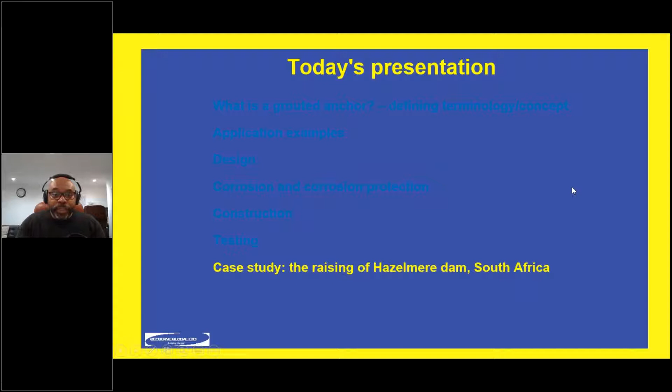It's a very broad-based subject that attracts a lot of controversy, regardless of what region you're dealing with in the world. Having gone through all that, I'll tie things up with a case study, a raising of Hazelmere Dam in South Africa, which should hopefully bring everything I've discussed into play and give you a full example of how these systems are applied in practice. Then finally, I'll tie things up with some closing remarks. So that's our setup today.

Starting off, if you approach someone uninformed and talk about the term anchor, the first image that comes to mind is the thing you throw over the side of a boat to stop it floating away. You throw a device which attaches itself to the seabed or ground below, with a chain or rope connected to it, and that's connected to the boat, stabilizing it on the water.

In many ways, a ground anchor acts similarly, but instead of stopping a boat floating away on the water, what we're essentially doing with a ground anchor is stabilizing a structure on the surface to stable ground beneath it. In certain applications, we're attaching unstable ground near the surface to more stable ground beneath the surface using similar technology.

I've extracted a figure from the execution code EN 1537, used in Europe. But regardless of where you are in the world, the basic elements of a ground anchor will be the same. I'm just using this as an example.

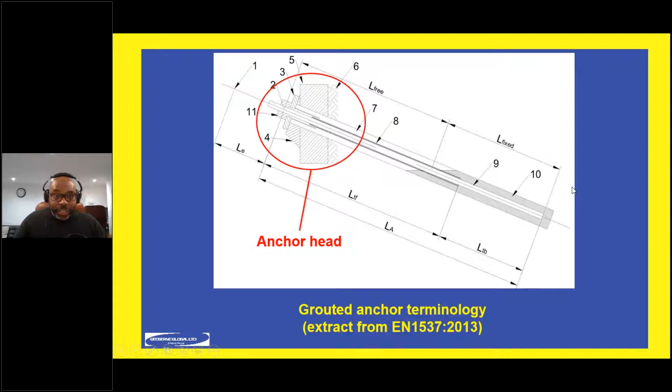I'm going to mention three main aspects of an anchor. First, the anchor head, the part of the anchor you can actually see, attached to the structure. Although in not every scenario can you access it, generally in anchor technology you can see the anchor head at the surface.

I'll then describe the free anchor length, a part of the anchor that's very important because it transfers loads from the surface through the ground to more stable ground beneath. The important feature of the free anchor length is that it's decoupled from the surrounding grout around it, so all it can do is transfer loads axially, not transversely — transferring loads from the anchor head through the ground to more stable ground beneath.

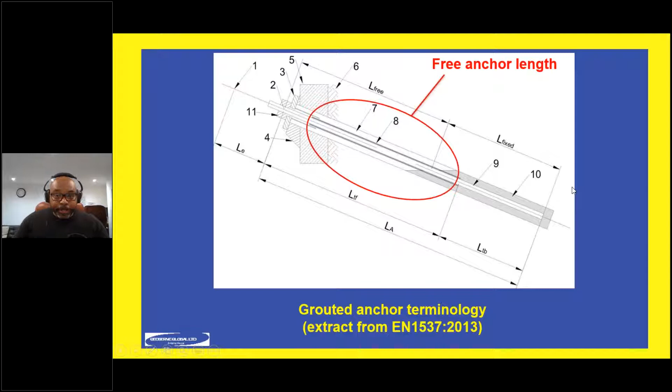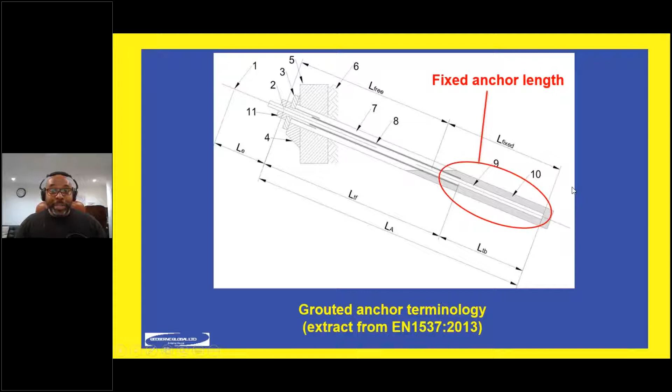The third element is the fixed anchor, which is a coupled feature — the free anchor length was decoupled, but this is coupled. It's attached to grout, which applies fixity to the surrounding ground. If you look at the analogy with the boat floating on water, this would be your anchoring mechanism on the seabed. The chain would be the free anchor length, and the attachment to the boat would be the anchor head. That's how we build the analogy with the boat.

Now we're going to really look at the concept. At the lower end of the scale, dealing with small anchors, or what we call rock bolts, generally they're about 6 meters long with loads not exceeding 10 tons, 100 kilonewtons. Usually if you have an excavation in ground, particularly in this example a tunnel, depending on how you excavate it, let's assume you're blasting through virgin rock. Generally you'll have a zone of unstable ground around the excavation.

If you drill through that unstable ground into stable ground and place a steel tendon or bar through it, grout it at one end, place an anchor head at the other, and apply a nominal tension, you can invoke a zone of stabilized compressive ground around that opening. If you do that in a fanned array, you can create a zone of compression around the whole opening and essentially stabilize it. That's the lower end of ground anchor technology — small lengths and small loads.

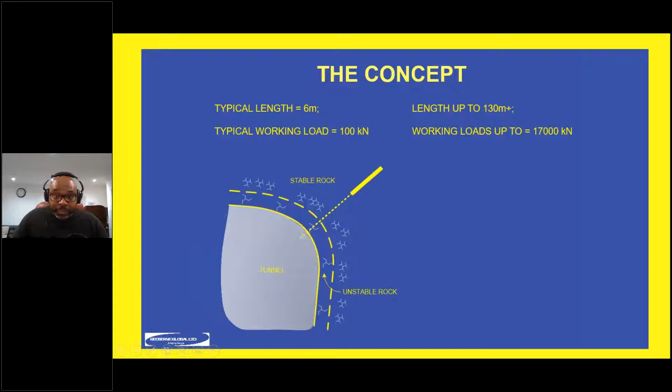As we increase the technology, we go up to the far end, where you can have lengths of over 130 meters and working loads in excess of 17,000 kilonewtons. These are massive systems, generally applied to dams, because a dam is a water retaining structure, and the philosophy is that the fewer holes you drill in a water retaining structure, the more benefit you'll derive. So large anchors have been developed for dams for that very reason.

What happens here is that when you want to resist overturning or sliding forces, you'll drill through the dam into stable rock below, place your anchor tendon in that, grout it in, apply the anchor head, and once you apply tension, you create a compressive force on the dam structure that effectively resists the overturning and sliding forces imposed by the stored water.

So those are the two ends of the scales, and hopefully that's illustrated the concept of how anchors actually work. What I want to move on to now is looking at some key applications, projects I've worked on personally and extracted from colleagues as well, showing you a wide range of applications on a worldwide basis.

So we'll start by looking at how things were done historically. Propping and shoring was a typical way to support an excavation. You'd produce an excavation in the ground so it doesn't fall in on you, typically shore it using sheet piles or wooden cladding, and then prop it. That was effective for many years, but looking at those photographs, you can see it doesn't facilitate the construction cycle because it's very cumbersome.

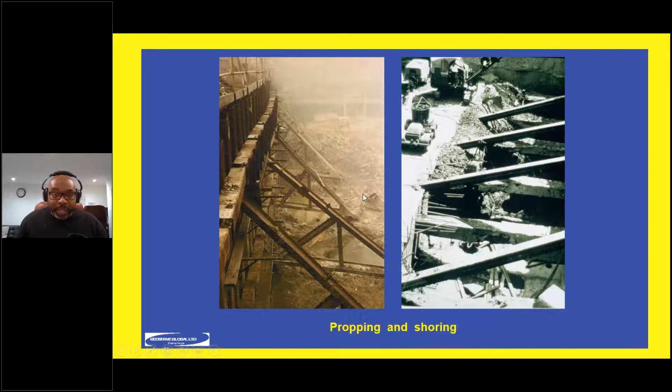It gets in the way of the movement of plant and is not a very effective way of supporting an excavation. Anchor technology allows us to optimize that whole process. This is a very interesting slide, taken during the construction of Central Station in Hong Kong, and it's unusual because it shows the contrast between using propping and using anchors.

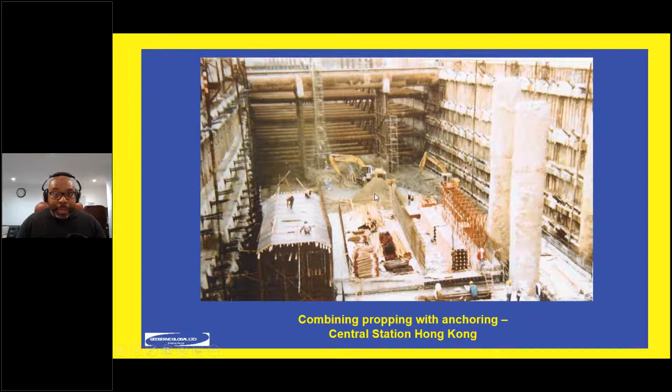In the background of that picture, the contractor wasn't able to get sufficient easements to drill into the adjacent ground, so they had to prop that area of the excavation to support it. In the foreground, you're seeing an anchored excavation, and the benefits are obvious because the excavation is completely open—you can store plant and material and facilitate the construction cycle a lot better.

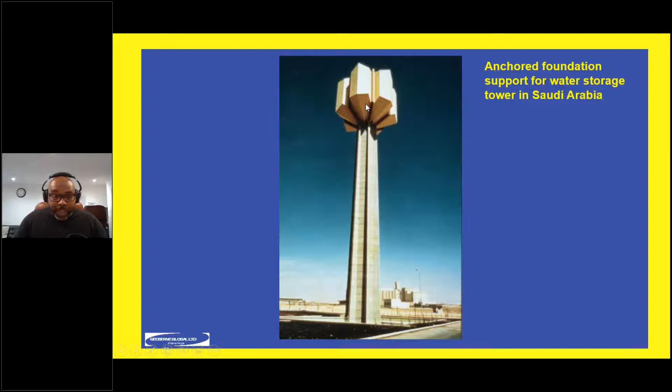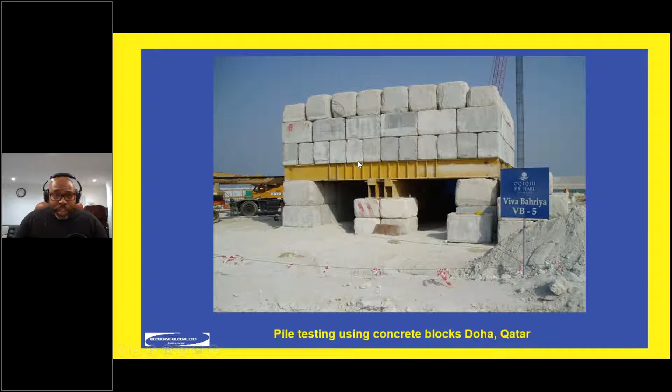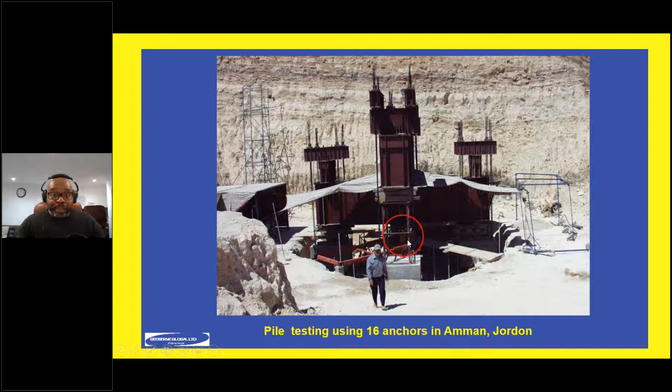The interesting thing about this project, the Wadi Abdoun Bridge, is that it's a very famous bridge because it was the first double bend suspension bridge in the world. You have many suspension bridges with a bend in them, but this was the first double bend suspension bridge. I worked on the anchors, the anchored foundations, for this project, which were in a seismic zone.

So we're just going through, taking you around the world now, showing you different projects where anchors have been used, which you may not have realized they would have been used in these scenarios.

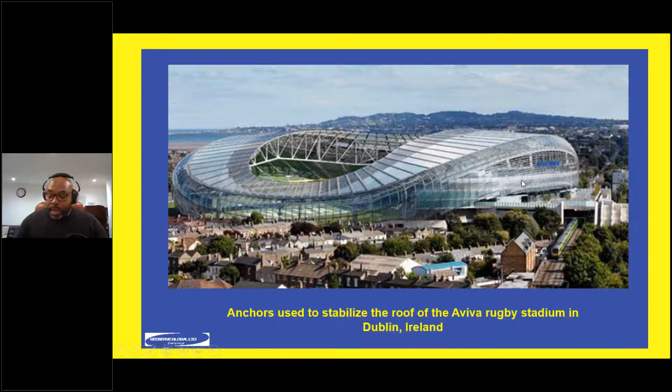Those of you who are interested in rugby would have heard of the Aviva Stadium in Dublin, Ireland. I worked on this project, beautiful structure, but this glass canopy acted like a kite. So when wind forces were imposed, the tendency would be for the whole roof structure to float off. To resist that, anchors were placed in the north and south blades of the Aviva Stadium, and I supervised the whole process. So another unusual example where anchors were applied, which laypersons would never realize.

A few years back, I worked in a region called Izmir in Turkey for a massive slope stabilization project in an oil refinery, where we used special anchors in the volcanic tuffs to stabilize the slopes. I put this example in because a few months ago, this region of Izmir was subject to an earthquake measured at 7 on the Richter scale, and the anchors were particularly put in place to resist earthquake loading. I was very pleased to have reports come back that the slope was not compromised during that earthquake, and the anchors were certainly fit for purpose. That was very comforting.

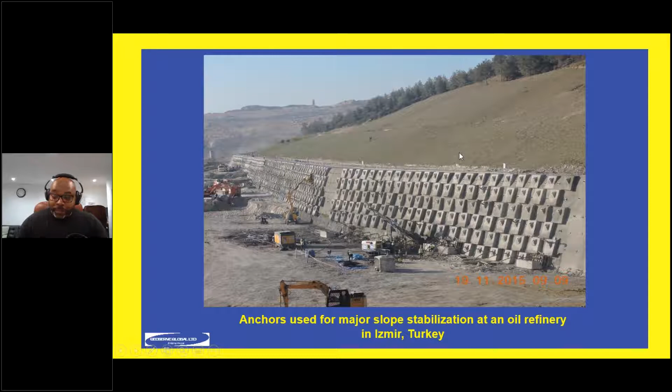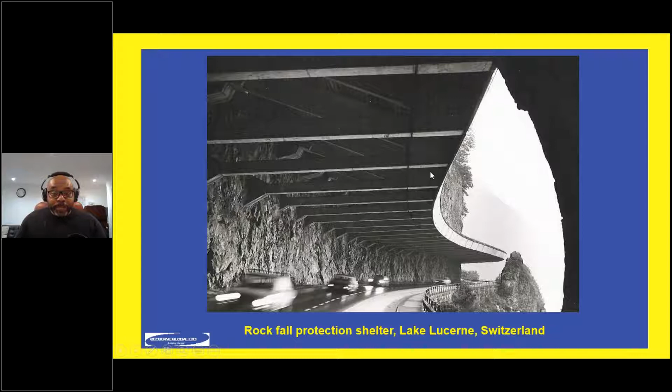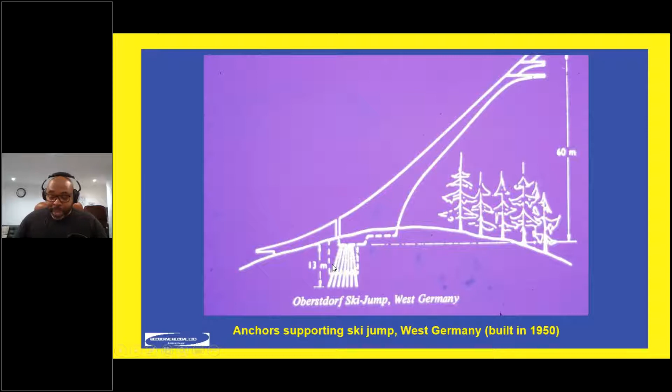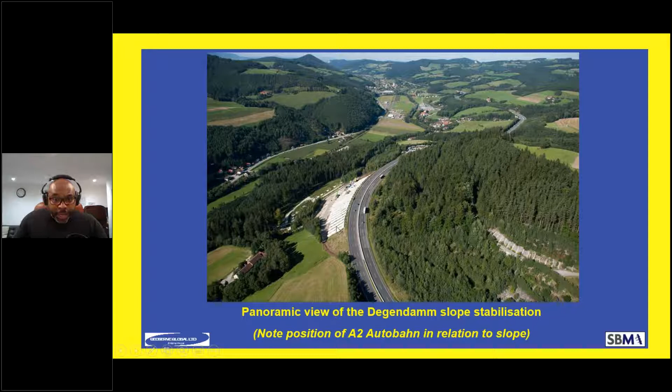Coming towards the end now, just a couple more slides illustrating examples. This is the A2 Autobahn in Austria, which carries road traffic from Vienna to Graz. This was subject to a massive slope failure, and the whole thing was stabilized using anchors in this zone. Large anchors were used, over 100 meters long, to stabilize this structure. We have the thrust blocks here, and you can see the roadway, the A2, on top. Again, another unusual application where very large anchors were used in poor ground to stabilize that slope and keep the integrity of that roadway in place.

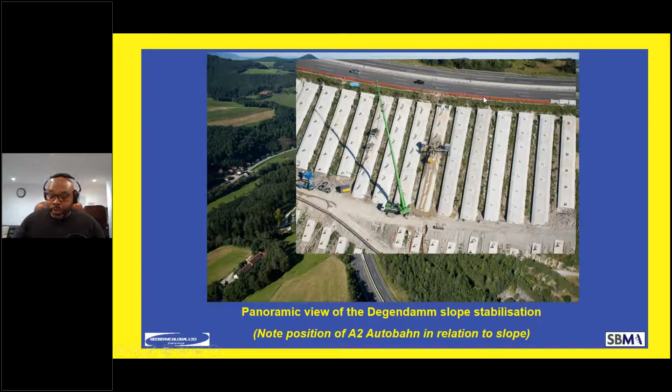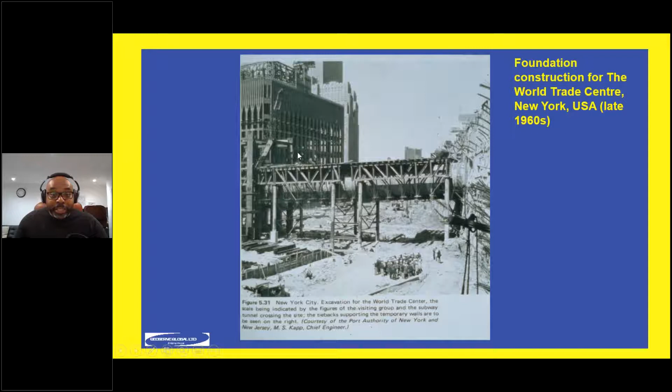My final slide is probably one none of you would ever have seen, a very rare photograph. It shows the construction of the Twin Towers, the World Trade Center in New York, back in the late 1960s. If you look to the right-hand side, you can see anchors supporting the foundation excavation. In the foreground, you can see reporters showing a lot of faith in the integrity of the anchors, standing that close to it. What's interesting is that the structure here is the New York Metro, which was fully excavated and underpinned and kept fully active during the whole excavation and construction process. Even by today's standards, that would be very challenging construction, so it's commendable to the engineers and contractors who managed to achieve this. But it was one of the early examples of anchors being used.

So that concludes the section on applications, and hopefully it's widened your mind on the vast array of applications where this technology can be used. What we will now move on to is looking at some principles in design. I'm not going to go into a lot of detail because we don't have the time, but just show you the basic fundamentals of how anchor technology is designed.

There are basically two aspects to the design considerations. The first is that you have to look at the overall stability, and then the fixed anchor design. Overall stability is about placing the fixed anchor at sufficient depth that if the structure tries to move, it has to mobilize a cone of rock. The resistance to movement is generated by this notional cone of rock, which increases the deeper you put the anchors. And if you put anchors adjacent to each other, this conical feature of rock within the ground increases as well.

You also have to ensure that the fixed anchor sticks in the ground itself, has sufficient bond capacity, or sticking force, around that fixed anchor so that it stays in place. So two aspects: overall stability, which relates to the depth of the fixed length placed in deep ground to mobilize sufficient rock resistance. And then fixed anchor design, which is designed for the length and diameter of anchor, so you have sufficient bond stress to give the sticking force that keeps the fixed anchor in place.

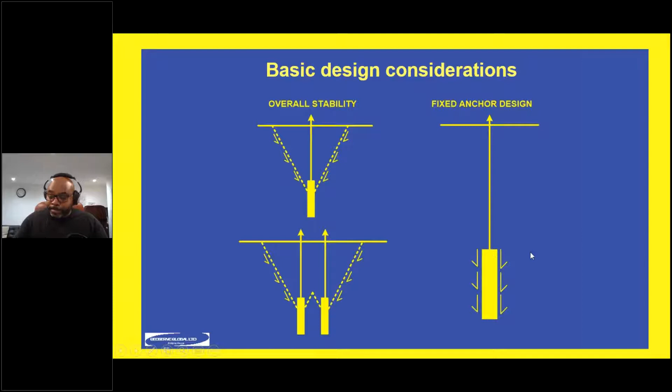Now, we're talking to an audience in India, but it's important that engineers are aware of what is happening around the world. Most of you may be aware that in Europe, most of the geotechnical industry has been taken over by the Eurocodes. Eurocode 7 addresses geotechnical design, and this slide is just to make you aware of the approach of Eurocode 7 where geotechnical design of anchors is concerned.

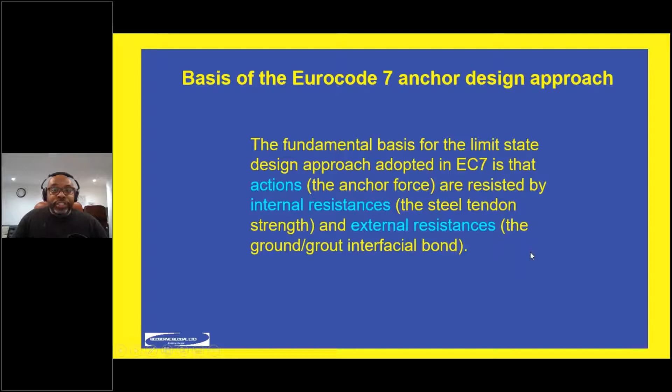The fundamental basis of the limit state design approach adopted in EC7, Eurocode 7, is that actions, which are the anchor force, are resisted by internal resistances, which is the steel tendon, and also external resistances, which is the bond stress at the ground-grout interface. So the interface between the grout body and the ground is one resistance, and the other is the steel tendon itself. These are two aspects that have to be considered when resisting the actions, the anchor force itself. That's all I'll say on that, but it's an exercise in awareness, so you understand the principles of what we're doing here in Europe.

I mentioned before that we are placing steel elements in the ground. There are many types of materials used in anchors, and they're currently developing carbon fibers and that sort of thing, but invariably steel is used as the primary material for creating the anchor tendon. Because we're placing steel in the ground, and we often have design service lives extending beyond 100 years, it's important that we protect that steel from the surrounding environment. Therefore, corrosion and corrosion protection are very topical issues.

So, just a very basic introduction to the nature of corrosion. There are basically three types of corrosion that we consider in anchor technology. The first is a generalized attack, where you have a general covering of corrosion on steel. Invariably, that is not necessarily detrimental; in fact, it can be beneficial to creating a good bond between the grout and steel. So one wouldn't necessarily be concerned if you had a general covering of rust on steel.

Often if I visit a site and I'm inspecting anchor tendons, I like to see a certain element of rust, because it ensures there's no contamination of grease on that steel, which is detrimental to bond. So a general covering is beneficial. What is not beneficial is a localized attack or pitting, small pits in localized areas along that steel. That is highly detrimental and can create early failures in anchors, so that wouldn't be desirable.

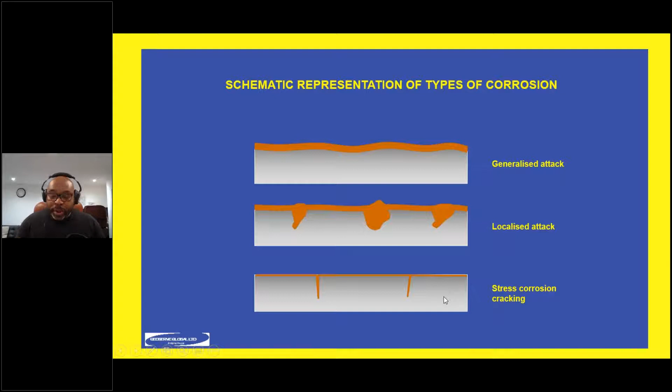The third mechanism is what we call stress corrosion cracking, or environmentally assisted stress corrosion cracking. This is a more complex mechanism based on the hydrogen content in the steel, which makes it more brittle, and high tensile steels are more susceptible to this mode of corrosion. So you have generalized attack, localized attack, and stress corrosion cracking as the three primary modes of corrosion we consider in anchor technology. Now, what you're seeing here is an unprotected steel tendon in a Victorian soil retention system with no protection at all. Clearly, you can see there's very little in the way of tensile capacity left in that element, and that's highly undesirable.

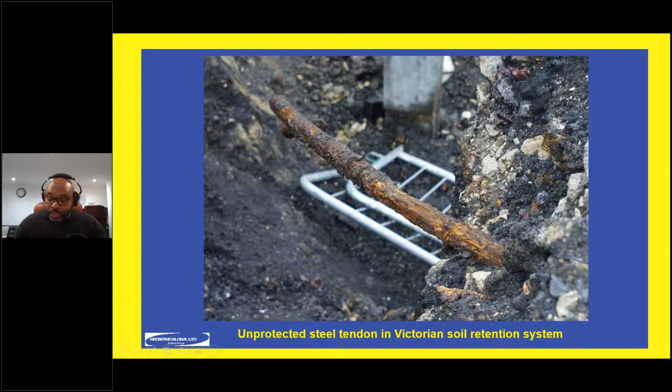And to avoid that situation, this is why we look to protect our tendons when they're in the ground. So how do we do that?

This is a slide taken from BS 8081 2015, a code of practice governed in the UK for anchor technology. There are many different practices around the world, but I've used this as an example because it tends to be the most rigorous that's actually applied.

Invariably, what comes up is the concept of double corrosion protection, where in the UK, two physical barriers are required to protect the steel tendon from the surrounding environment. So in the free length, you have polypropylene sheaths, one sheath and a second sheath around the steel tendon to protect it from corrosion. And in the fixed length, we have polypropylene tubes or ducts. Two physical barriers protecting the steel from the outside environment, so there's no reliance on the grout to do that.

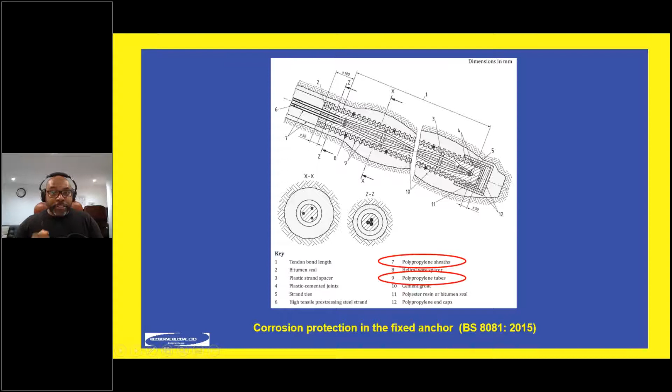Now, cement grout is alkaline in nature, and it has a passivating effect where corrosion is concerned. But because it cracks, it's not relied upon as a primary protective means. Physical barriers are required in UK practice.

So what I did was create what we call a grout simulation, where I created a plastic tube the same diameter as a borehole, installed a test anchor inside it, grouted it in, and once the grout cured, cut it in sections to demonstrate to the client how double corrosion protection actually works.

In the free length section, you're seeing the first barrier to protection, as the arrow indicates, and then the second barrier, the sheathing around the strands themselves. This sheathing has the strand surrounded in grease or corrosion inhibiting compound, so it can slide axially up and down without transferring load transversely. This is what we call the decoupled effect.

So essentially you have two barriers there. In the fixed anchor, clearly we have the first barrier and then the second barrier, double corrosion protection. The strands here have no sheathing around them because they're connected to the grout - they have to be connected to the grout because they need to transfer load and give us the fixity we want in the ground. But clearly what you have here is two barriers, both in the fixed anchor and the free anchor length, which is the definition of double corrosion protection.

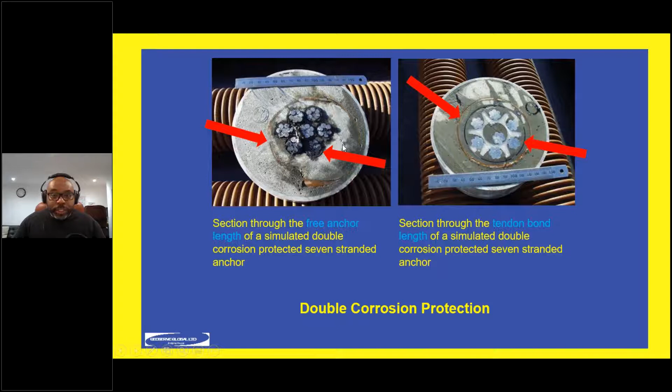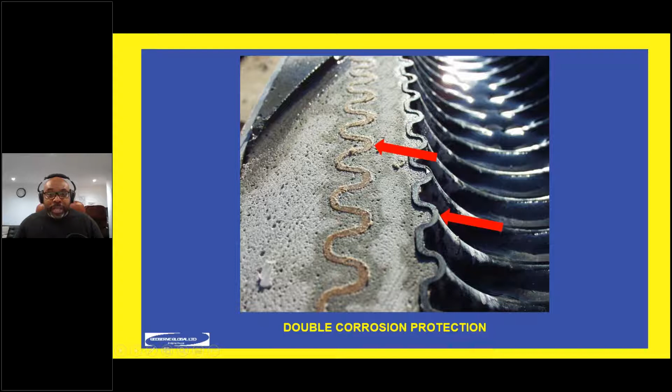What I then did is remove the tendon completely and cut the whole simulation longitudinally. So what you're seeing here is the first barrier, corrugated plastic duct, and then the second barrier, and the outer tube here is the borehole. So it's a simulation showing you how double corrosion protection actually works, giving you two physical barriers.

So that's enough on design and corrosion. What we'll now move on to is construction, going through the main elements of what constitutes this technology and implements it in the field.

What I've done here is really look to illustrate the four basic aspects of grouted anchor construction. First, you'll drill a borehole. Secondly, you'll install the tendon in the borehole. You'll then grout the tendon in the borehole. And the final stage, you'll apply a pre-stress to the anchor assembly. Those are the four basic elements.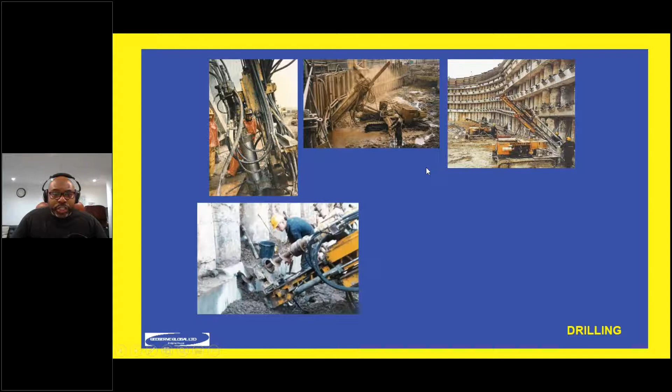Where drilling is concerned, all I'm going to do is put up a few slides here, just showing you, if you're not familiar with this technology, how it actually looks in the field. These are basic anchor projects, stabilizing excavations where we're drilling the anchors in using these drilling rigs.

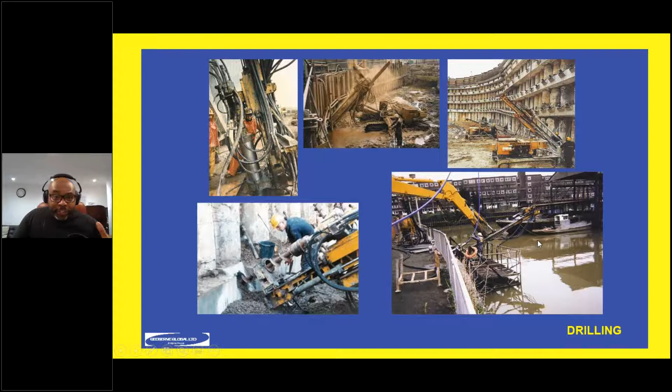Here we have an auger going into alluvial deposits. Often when you're adjacent to water and installing anchors to support wharf walls, you can attach a drilling mechanism to a construction plant like that and drill back on yourself. That's a good example of how you can work when working above water, and it saves you going on the water with barges, drilling in from that end. So it's a very convenient way of doing it, and gives you a feel of how drilling looks in reality on a construction anchor site.

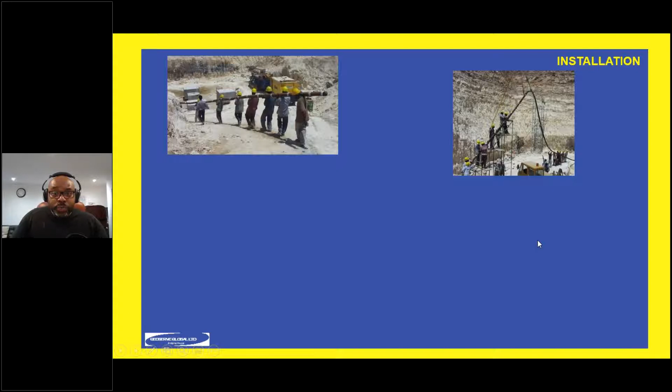Installation of anchors, sometimes we have to use operatives to carry the anchors into place. We use cranes. If the anchors are very, very big, we have to use trailers with tractors to drag them along, and they're very different means of installing anchors.

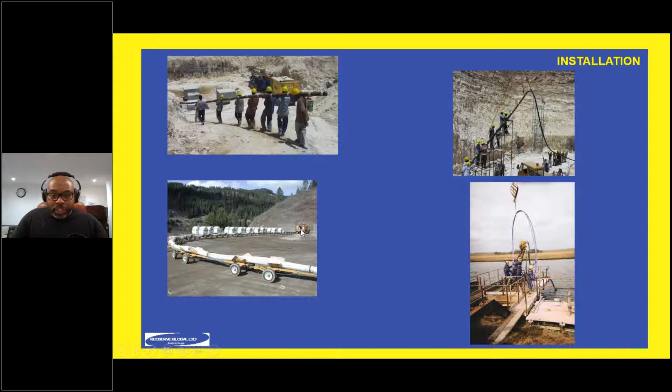Often in remote sites, we even have to use helicopters to get those anchor tendons in place. This is a helicopter installing an anchor tendon on a dam. So again, a few pictures just flashed up to give you an indication of how this looks in reality on site.

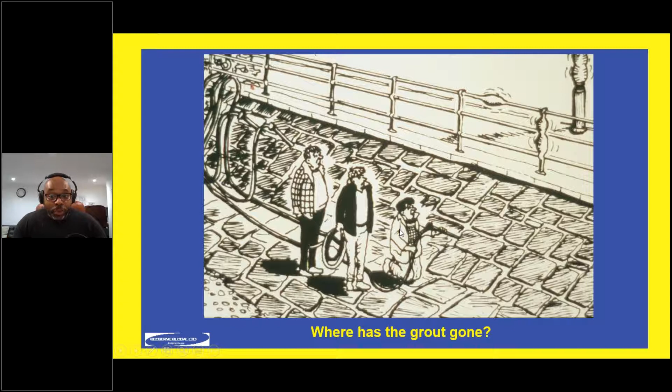If you're dealing with poor ground like this, it wouldn't be sensible to simply drill a borehole, put your anchor tendon in, and start grouting it. Because the ground is so permeable, the grout would simply run away into the ground and wouldn't give you the mechanical bond that you actually need.

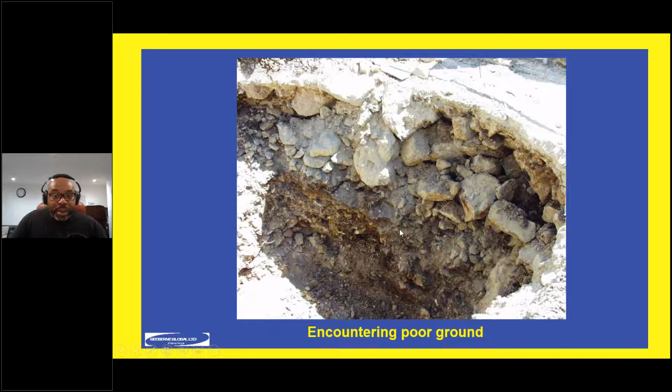So the important point here is that when you're encountering poor ground with anchors, the idea would be to create your borehole and pre-treat that ground by pre-grouting it first. You'll then re-drill it, place your tendon, having water tested to make sure it's grout tight. You then place your primary grout. So when encountering poor ground, you pre-treat the ground first so you can get adequate primary grout to stay in place.

The final stage is stressing and testing. Generally speaking, we do this using hydraulic jacks because we want to apply a pre-stress force to the anchor to give it that restraining force to the structure.

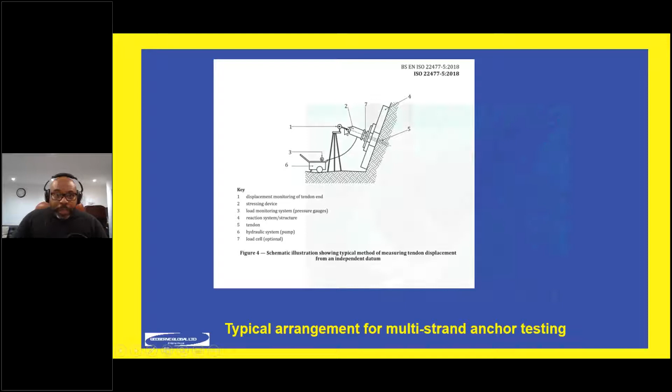How this looks in reality is like this, where you have the hydraulic stressing jack, the anchor tendons, which are pre-stressing strands coming out here. You can use single bars as anchors, but in this example it's strand, pre-stressing strand. And you see a dial gauge here measuring the displacement of that jack, giving you the load extension characteristics of that anchor.

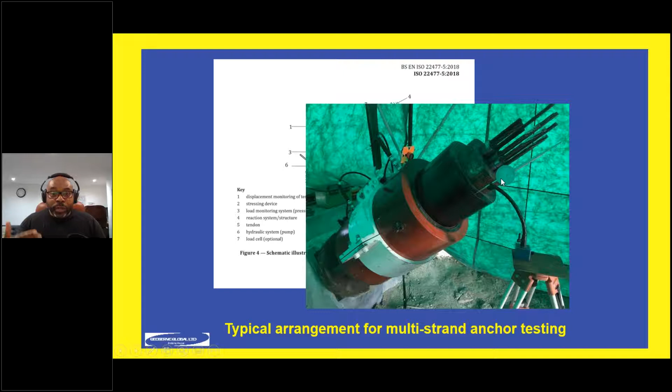The philosophy in testing, no matter where you are in the world, is always the same. You generally impose a load on the anchor greater than that which is required of it in service, so greater than its working load. That's called the proof load. You hold it at the proof load for a certain period of time, and you monitor its ability to retain its load or its creep characteristics. Having done that, if it's within certain limits, then the anchor can be deemed satisfactory.

This is an extract from the latest European testing code. It's an International Standards Organization document, 22477 Part 5, issued in 2018. It shows, and it's the primary code used in Europe, there are basically three test methods, and this slide is showing the first test method, which is used in the UK.

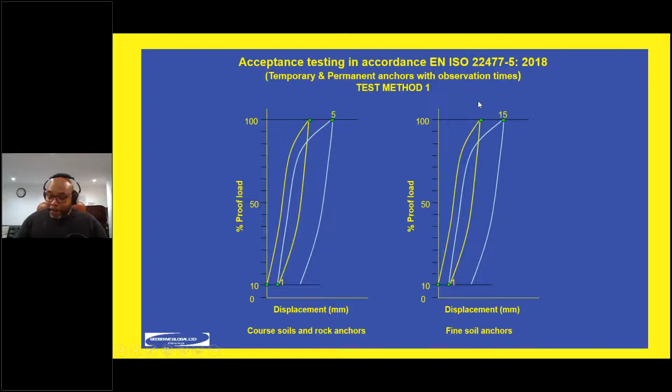I've had to go through this very quickly, but for those of you who are interested, Ground Engineering Magazine, December 2018, I produced a technical note covering all the basics of anchor testing and the philosophy behind the new testing code that was published in 2018. So for those of you who are interested, Ground Engineering Magazine, December 2018 edition has a full article on that.

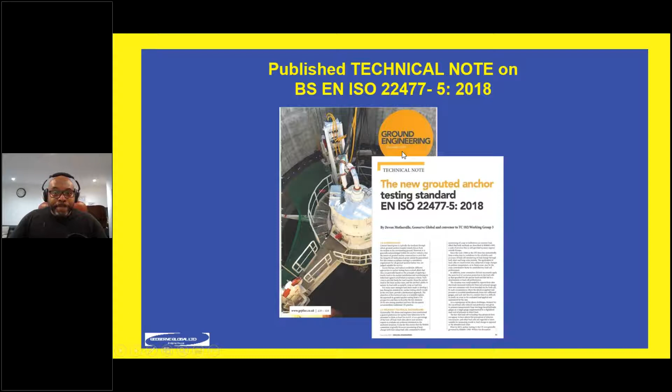Our section moderator, Mr. Rambabu, commented on the fact that we created a special tool to facilitate the testing process, called AnchorTest. I'm mentioning it now because it's a contemporary technology that is really at the forefront of anchor technology right now. There isn't another product like it.

Essentially, what we found is that using laptops on site and that sort of thing is very cumbersome, and they're not really suited to the rigors of a dirty site environment. So we created a tool on an iPad, which allows us to optimize the whole analysis and data processing aspects of anchor testing in real time.

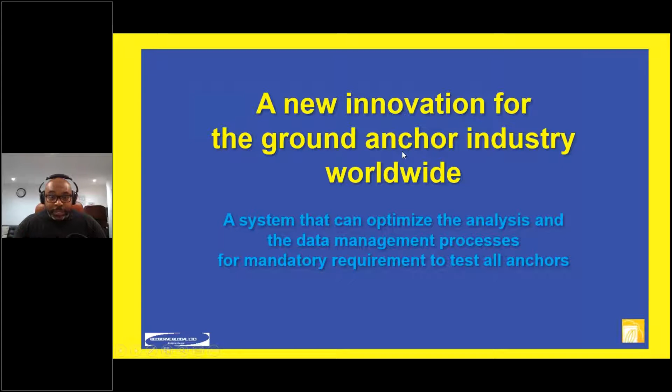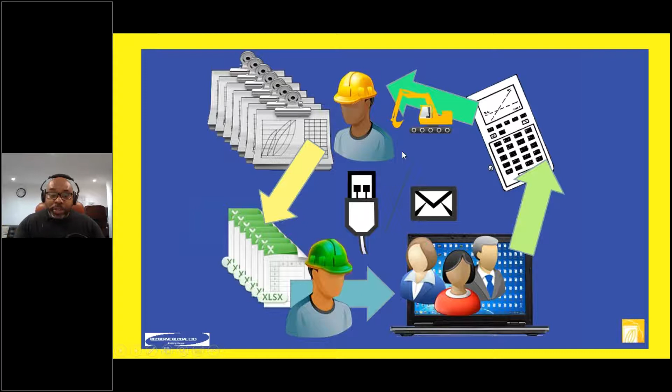Anchor testing is a mandatory process, but it can be very time consuming and creates a lot of data. Often when that data is created, people put it into Excel spreadsheets. It's then analyzed and compared with certain criteria, which it has to pass before you get the go-ahead to move to the next level of excavation and anchor installations. This process can be very time-consuming.

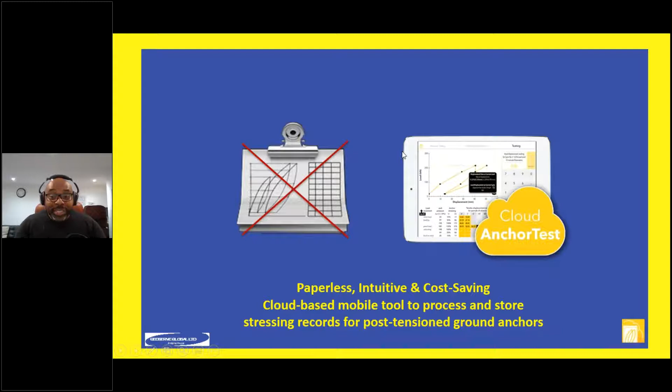I've experienced this personally. By the time we get the go-ahead to move ahead, time has gone and the program is slipping. The tool we've created, Anchor Test, takes away that process and gives you a paperless solution which allows you to process the data and assess the anchor in real time, so you can give decisions immediately on how the anchor is behaving. Here are a couple of screenshots illustrating how the iPad looks in reality, where we can analyze the load extension behavior of the anchor, assess it against the criteria specified in the standards, and give a decision immediately on whether the anchor is fit for purpose. That way you can move on to the next installation.

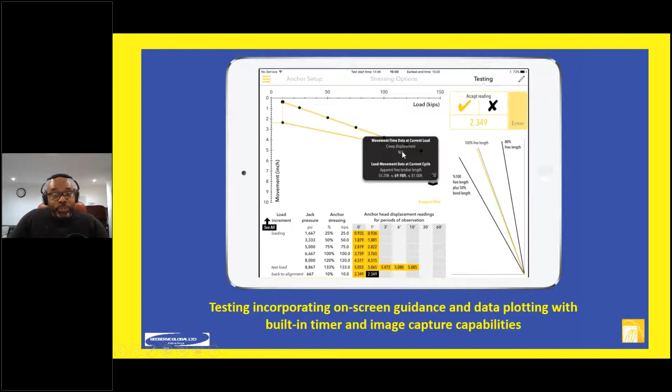It's a cloud-based solution, so all the information is on the cloud. Any nominated expert can view that information and give us feedback to the site in real time. It's proved to be a very useful tool in anchor technology used worldwide, and I wanted to introduce that to you. The benefit of being cloud-based is that it makes things work a lot quicker, in a much faster way. The process is analyzed, the data is stored, and assessments are made in real time. Please be aware of that.

Having gone through all those basic processes, we looked at applications, design, construction, testing, and corrosion protection. We looked at Anchor Test. What I want to do now is bring everything together in the final part of the presentation to show you how all these aspects are implemented on a real site.

This is a very special site because it was a project in South Africa where they decided to raise a dam by an unprecedented 7 meters.

The Hazelmere Dam is situated on the east coast of South Africa, near a place called Durban, a very beautiful part of the world. The dam is located on the Mdloti River in the KwaZulu-Natal region of South Africa, about 5 kilometers from the town of Verulam. It's a conventional concrete gravity dam built in 1976 for water supply purposes, but importantly, it was founded on quartzitic sandstone.

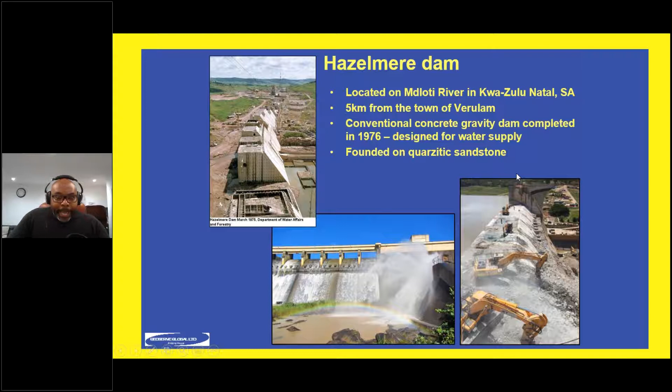The other main features you should be aware of: the dam was 48 meters high, 478 meters long, but importantly, the full supply level was going to be raised by 7 meters. In other words, to give increased water supply, they had to raise the height of the dam. By doing that, you had to have a means of stabilizing it. Prior to using anchor technology, the South Africans were simply going to use mass concrete, creating a massive gravity footprint to execute this solution, but this wouldn't be an environmentally acceptable solution. So when we introduced anchor technology, it was seen to be far more optimal in creating the stability needed.

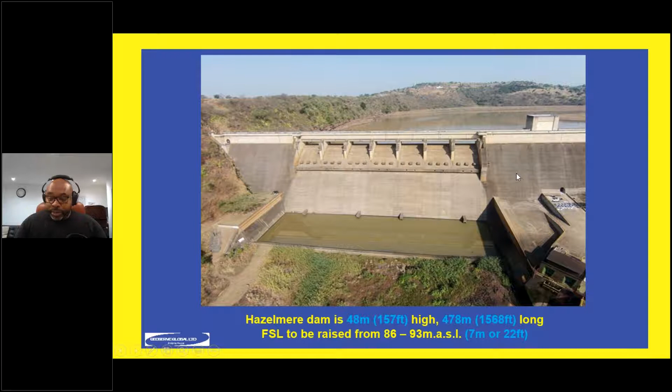There are 3 key aspects of this construction. The first is the restoration of the grout curtain. Now what does that mean? If you have a concrete gravity dam storing water, there's a tendency for water to seep underneath the dam, which could create uplift problems and stability issues that need to be addressed. The original contractor addressed this by creating a grout curtain - a wall of grout beneath the dam which intercepts the flow path of water from the reservoir and keeps the dam stable. But tests showed this grout curtain was being compromised over time, so they had to restore it.

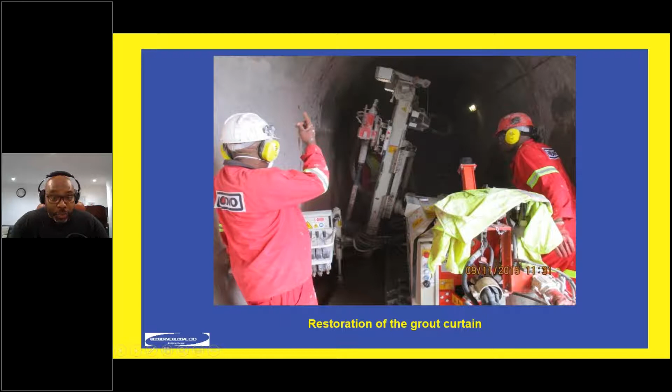And that was the first aspect of construction.

The second aspect of the construction was creation of what we call a piano key weir, an unusual structure in the spillway of the dam. It increases the hydraulic length of the spillway by a factor of 6 by creating this zigzag, piano key configuration. Because they had to dig down 3 meters to create this structure, and we're increasing the dam by 7 meters, a 10-meter piano key weir happened to be the largest PKW in the world. So again, a key feature of construction.

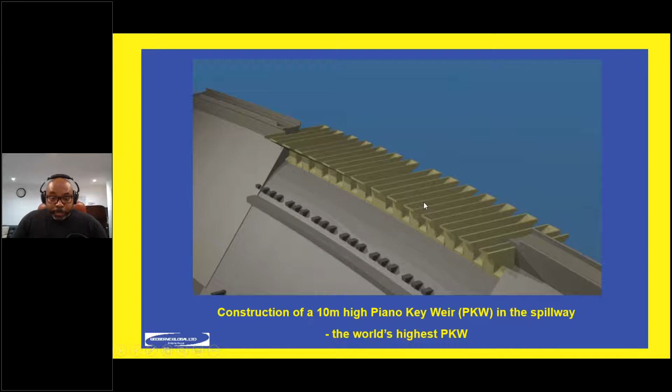The third feature, which is what I'm going to focus the talk on, is the fact that we had to use anchors to stabilize the dam. Essentially, 83 anchors were used, but what's important is that the test loads of these anchors went up to in excess of 19,000 kilonewtons, that's over 4,200 kips. The boreholes were 355 millimeters in diameter, and the overall length of the anchors were 90 meters. It was constructed using the specification BS 8081 1989, the British Standard Code of Practice for ground anchorages.

Very unusual, and it so happens that this happened to be the largest capacity cyclically loaded anchor system in the world when it was actually constructed. So when you're dealing with a project of this nature, it's very important to mitigate failures. You have to carry out a substantial test anchor program, and we essentially executed the largest sacrificial test anchor program in the world when we actually did this.

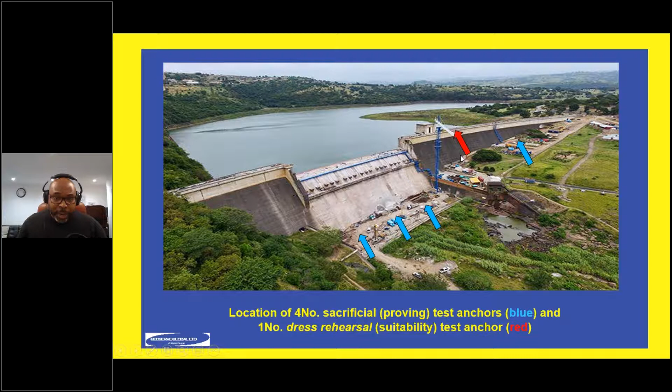The red arrow illustrates the position of what we call a dress rehearsal anchor, installed in the crest of the dam so that the contractor could demonstrate their ability to execute an anchor under these conditions. This is highly specialist work, and even though the contractor had a very strong CV, they hadn't worked in South Africa before. So I stipulated that I wanted them to carry out these test anchor programs so they could demonstrate their abilities to execute the work effectively.

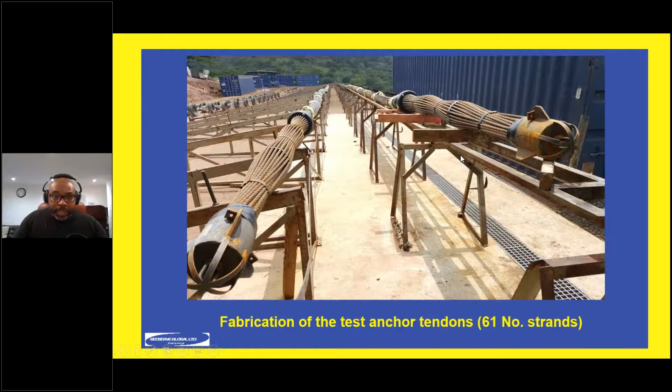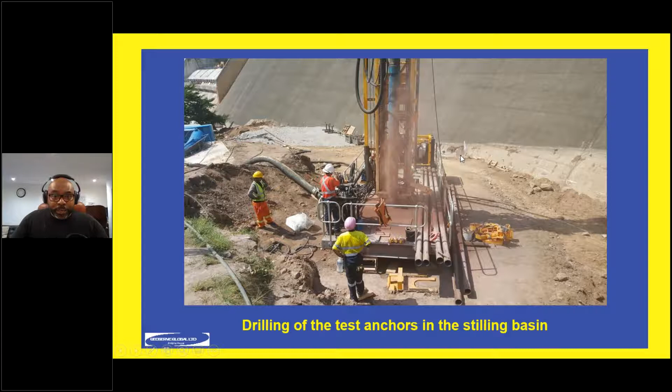A few photographs now just showing you the drilling of the test anchors in the stilling basin. This is the downstream end of the dam. It was logistically favorable that we constructed the stressing blocks off-site and constructed the anchors as a separate exercise.

So the anchors were fully constructed first. The thrust blocks were then taken, craned into place, and placed on top of the anchor. This is because we're using large punching loads and we don't want that load to punch into the ground, so you need some sort of reaction block. These are the placements of the reaction blocks.

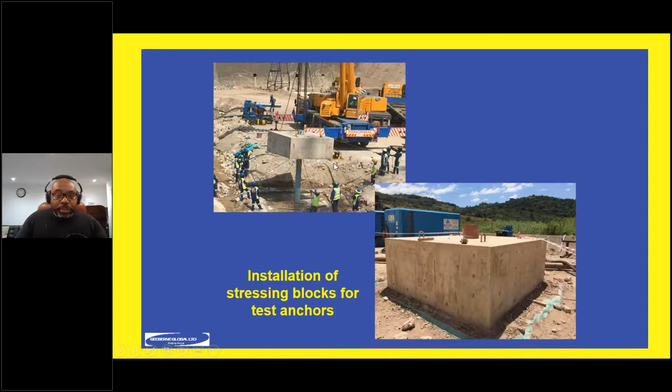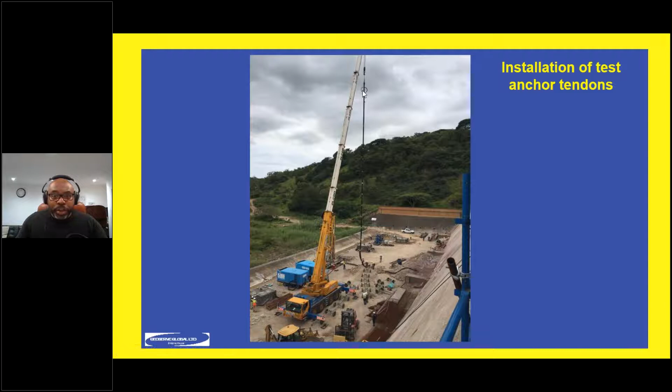Here's a slide showing the placement of the anchor tendon itself using a crane here. You can see the buggies bringing the anchor along, then it's lifted off and placed inside the borehole. These are typically 40 meters long. But importantly, they place the fixed anchor in the location where the production fixed anchors would be placed when the anchor were actually constructed for the full dam.

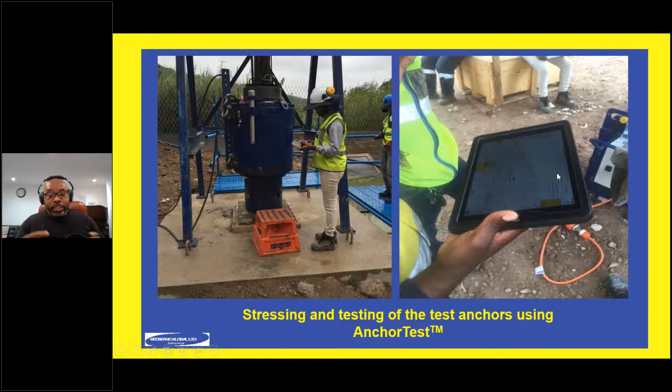Once again, this is the stressing of the test anchors and the use of AnchorTest to give us a real-time indication of how the anchors are behaving and showing that they were fit for purpose. We took the test anchors to failure to find out the geotechnical capacity of the ground, so we deliberately tried to fail them. It so happens at the time that the rock was sufficiently strong that we couldn't generate failure, but we got maximum test loads, and we were able to use that data to facilitate and optimize our design of the production anchors.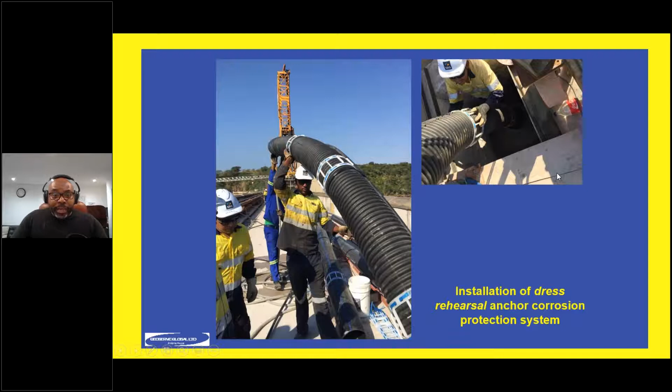The corrosion protection system used was very substantial, involving polypropylene ducts. I mentioned double corrosion protection in a previous slide, but it's important to point out that the code of practice allows double corrosion protection or single protection. You can use single protection providing you prove the integrity of that protective barrier in situ.

What that means in reality is that we installed a single barrier into the ground, and tested it in situ using a water test to show it had full integrity. Once that was proven, we were able to use it as a protective barrier. If you're not carrying out that process, you have to use double protection, which are two physical barriers, meaning the outer barrier is essentially sacrificial, because you only need one barrier intact to protect the anchor.

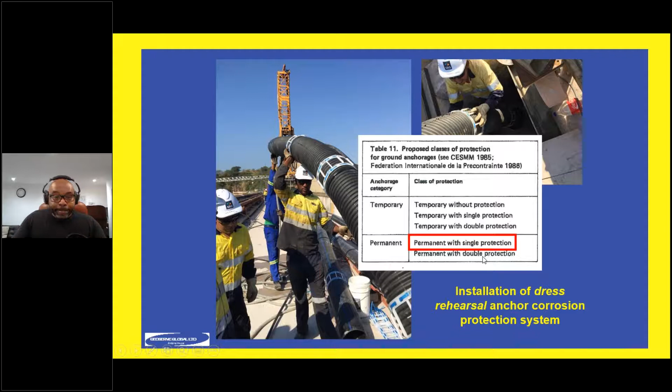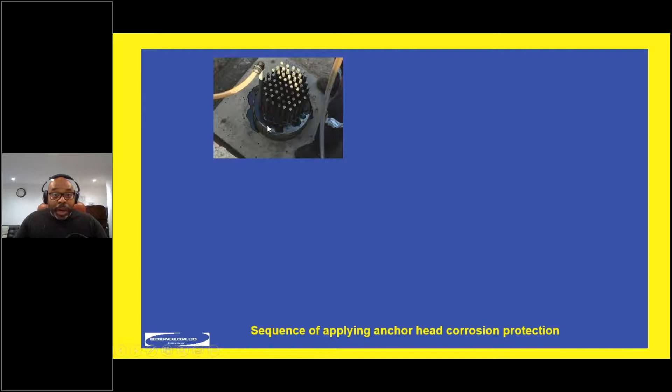We know from experience that the anchor head is one of the critical locations where corrosion can occur. So once the anchor head is put in place, a special wax is injected beneath it to fill the void, which is vulnerable to corrosion. We then place a special sleeve around the anchors and corrosion inhibiting tape, and fill that with a wax compound. Once the whole thing sets, it is then covered in a galvanized cap.

What this allows us to do is that in future, if we need to inspect the anchors, we can take the caps off, remove the grease, inspect it, analyze it, check it for loads, and replace and reinstate the whole thing afterwards. This is what was required in the contract itself.

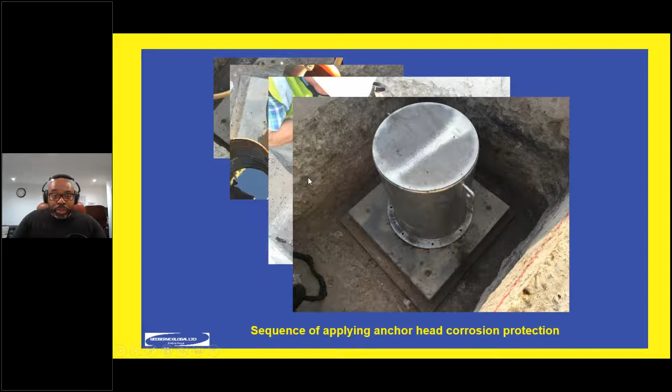So, stressing and testing. In order to stress these anchors, we actually had to commission the construction of the largest hydraulic stressing jacks used for anchors. These had a capacity of 22 meganewtons, or 22,000 kilonewtons.

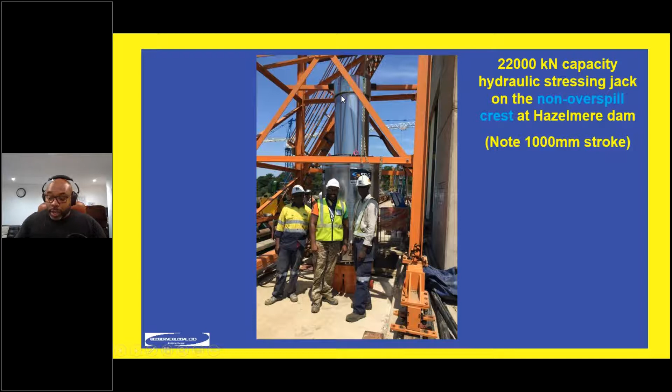I'm 5'10" tall, and this gentleman next to me is about 6'2". So you can see, when the whole thing is extended, the size of these systems - they're absolutely massive, weighing approximately 10 tons. They had to be handled very carefully to put in place, but we needed that kind of capacity to generate the working loads required in this structure.

Here's a photograph of me stressing and using anchor test equipment to analyze the data on an 80-strand anchor in the spillway tunnel of the dam.

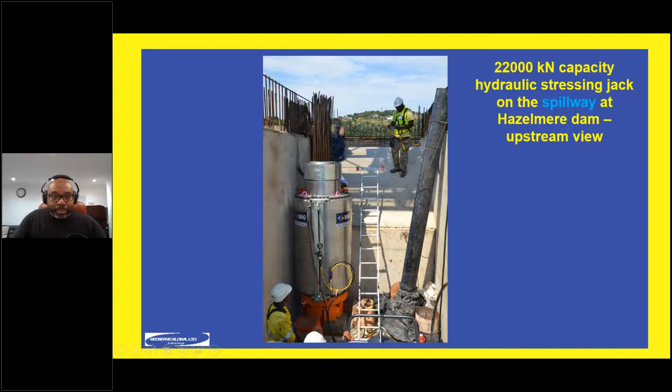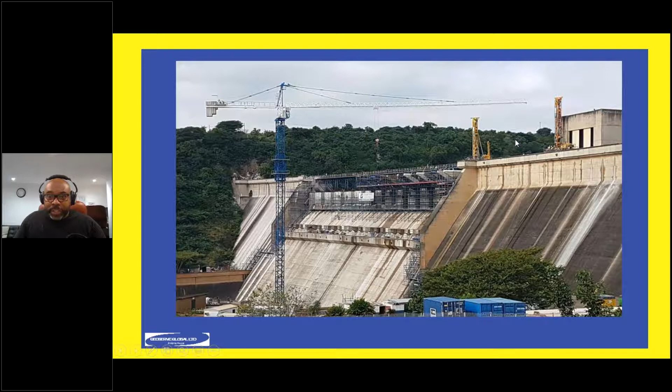Back in May 2017, here's a picture of how the structure looked then - the spillway, the PKW, during its construction, with drilling rigs for the anchors in place. Importantly, at that time the water level had increased so the full supply level was 120% of its original level. So even without all the anchors in place, the structure was already being tested - a critical stage, with the whole dam monitored for movement to show its full structural integrity was in place.

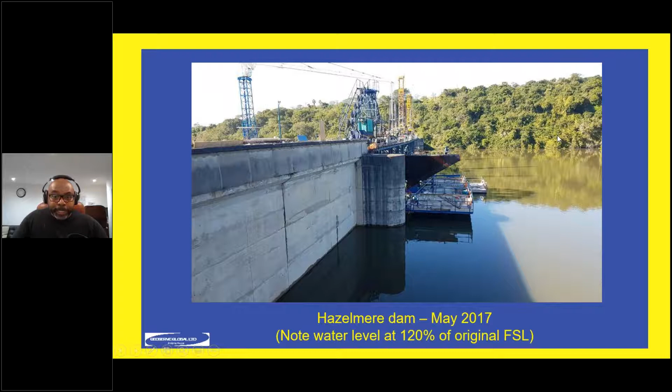Moving from May to November 2017, the PKW is well underway now. Many of those units are fully constructed and many of the anchors actually put in place, just giving you a visual impression of how the project looks through time.

Then we go to February 2019, where the PKW is fully constructed now, and out of the 83 anchors, 73 of them are fully constructed.

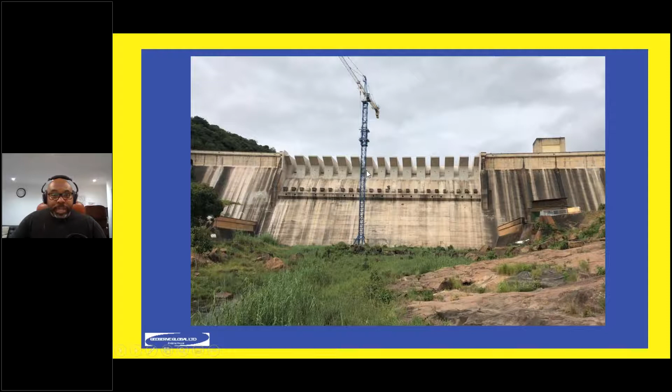Interestingly, this project is still ongoing because for non-engineering reasons, it had to be stopped at a certain point for a period of 3 years. We have to go back there, and I'm now commissioned to return in a few months to complete the final instrumentation of the remaining 10 anchors to make up the 83. So 73 are in place, 10 remaining, and they're going to be fully instrumented with load cells and that sort of thing.

For those interested, the September and October 2018 edition of Deep Foundations magazine produced an article called Dam Anchoring Fundamentals. In the November-December edition, part 2 of that article came out, describing a lot of the elements of this particular case history, giving further insight into the project.

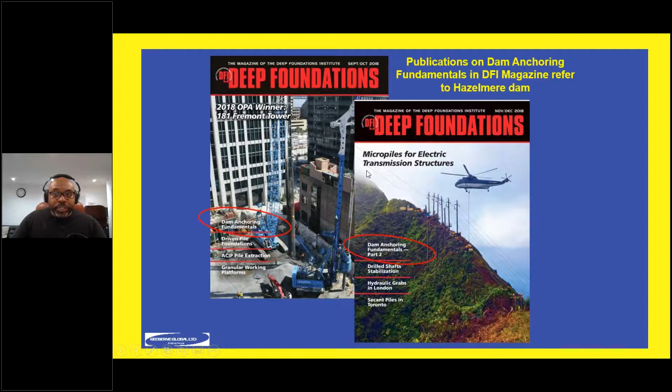So some closing remarks just to finish things off.

Essentially, we started off by defining what a grouted anchor was, described and illustrated the various applications with examples drawn from a worldwide database of projects. Hopefully that gave you a feel for how anchor technology is applied on a variety of different projects, from deep excavations to holding down water towers to supporting dams, etc.

We then went on to look at the fundamentals of anchor design, including corrosion protection and corrosion, construction, and the mandatory testing process. Those are the basic elements which form the anchor, and hopefully it gives you a feel for how the basic elements are put in place to get this implementation of the technology in practice.

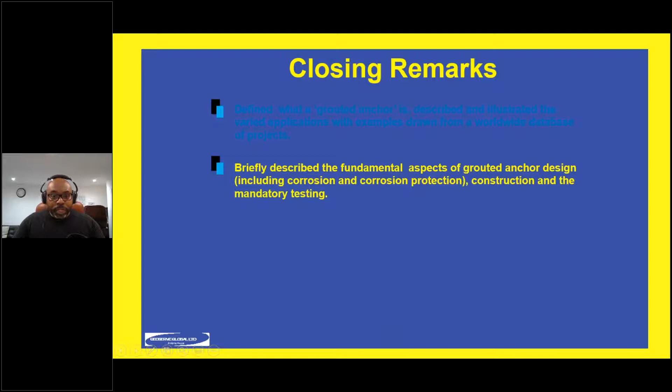Finally, we then looked at a case study which described the raising of Hazelmere Dam. It's not often you get a situation in engineering practice where you have a number of world firsts put in place, but we had that on this project.

One of them being, we implemented the world's largest capacity cyclically loaded anchors. We also instigated the largest capacity hydraulic stressing jack equipment for pre-stressing anchors. We constructed the highest PKW. The largest sacrificial test anchor program was put in place, and it was the first use of the software package AnchorTest on a dam project for the management and storage of data in real time.

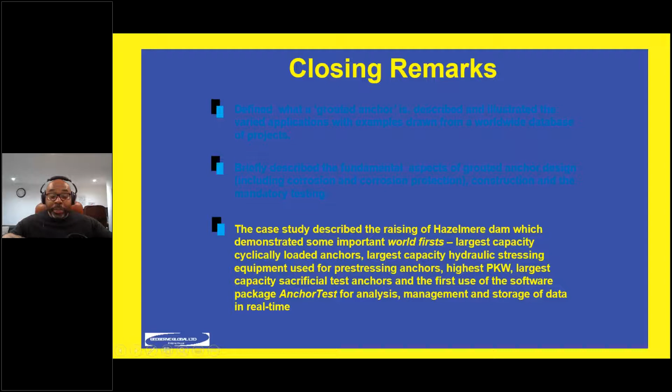So all these elements made the project very, very interesting. And once we complete the exercise, no doubt further papers and everything will come out once we instrument it and look at the behavior of this structure through its design service life. So with that, I'd like to thank you for your attention and hand you back to our session moderator. Thank you.

Well, thank you very much, Dr. Devon. As expected, it was wonderful, wonderful, wonderful. You gave a wonderful overview of a variety of projects across the continents. And then you introduced very nicely the basic concepts of designs with a little importance to the corrosion protection. And the capping of the whole thing is a fantastic case history of dam raising by around 7 meters of Hazelmere Dam near Durban in South Africa.

Everything associated with that project is all large. So nice to know the largest equipment that you developed for stressing, which can stress up to 2,200 tons. It is one of the very biggest things. We use 1/100th of that in most of our projects. And the height of that compared to a tall man, the tall man still appears to be short in front of that. That's a wonderful thing. And the largest PKW that you could put in place.